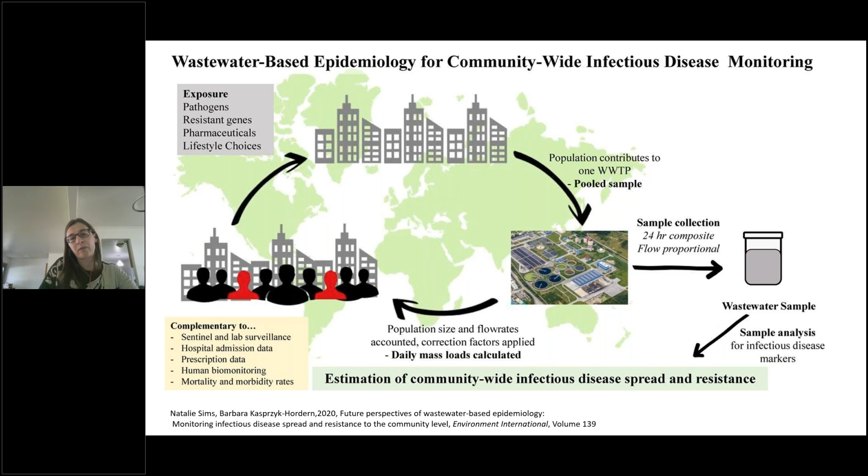So this is not a completely new tool. It's been used, it's been researched for a very long time, over probably 100 years, but really used and applied mainly for poliovirus transmission in developing countries. And the World Health Organization actually has a manual for environmental surveillance.

So in a lot of developing countries, you don't have centralized wastewater collection systems. So then often you use some type of wastewater collection systems if they are present, or even river surveillance if they are influenced by human waste. So it's actually been used to prevent outbreaks of poliovirus. For example, one of the most recent uses is from a developed country, Israel, where they detected it in wastewater in 2013 and were able to track the disease outbreak and prevent it from spreading.

There are also other international long-term studies of, for example, drug consumption in Europe. And the picture is the map of the European illicit drug use network. They have a public dashboard. There, drug surveillance has been used to understand where public health responses could be targeted. We will mainly focus this presentation on infectious disease monitoring and not on monitoring of chemical markers.

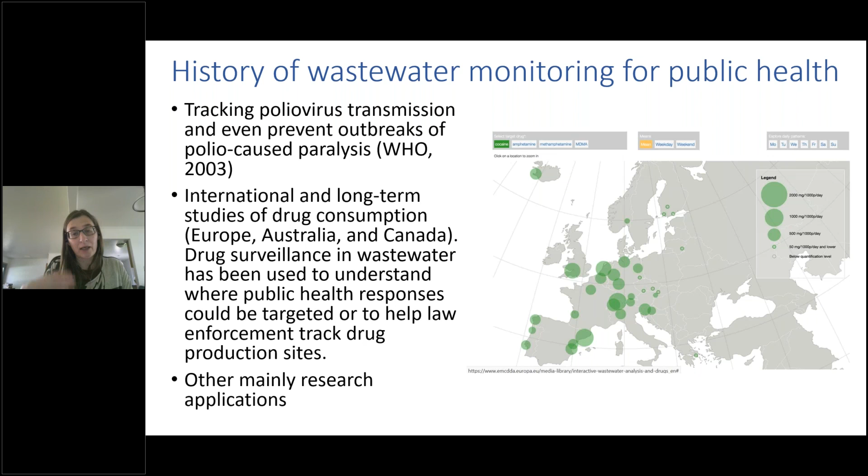Other applications have mainly been research, but it really became national and international applied science during the SARS-CoV-2 pandemic. Early in the COVID-19 outbreak, some researchers, especially those who had already established wastewater monitoring of influent for public health, noticed that SARS-CoV-2 RNA is present in wastewater.

On the right-hand side is a figure from more recent research trying to quantify where the COVID-19 RNA in wastewater comes from, and mainly it's connected with feces. Notice the x-axis is a logarithmic scale, so feces contains 2 orders of magnitude more than other sources like urine or saliva.

So they noticed it's in the wastewater and started tracking it, measuring it as an RNA fragment. There is some research looking into whether the virus in wastewater is infective, and it really hasn't been shown. People didn't even manage to isolate infective SARS-CoV-2 virus from feces, and it gets even more degraded in wastewater.

People are looking at whether the virus is present as a particle or just as a genetic signal, and most of it is genetic signal. There are also studies comparing wastewater operators or treatment workers with others, looking at disease incidence, and they really don't see a difference. So right now the science shows it's not infective anymore when it's in the wastewater - we're measuring it just as RNA, not as a virus.

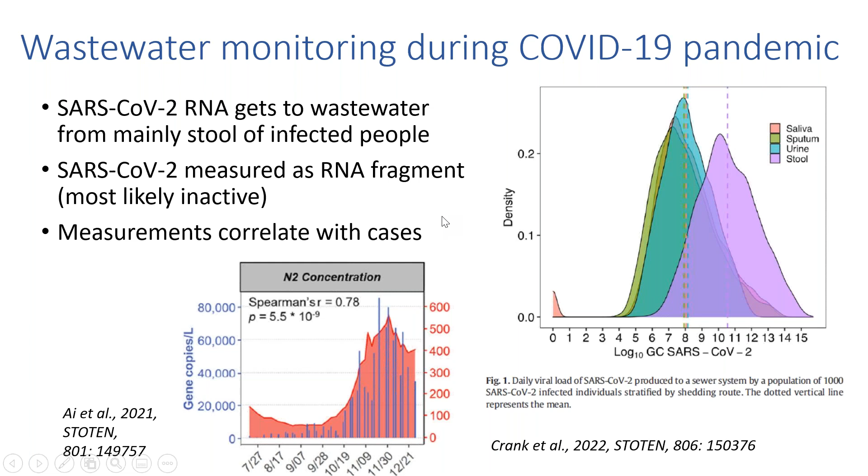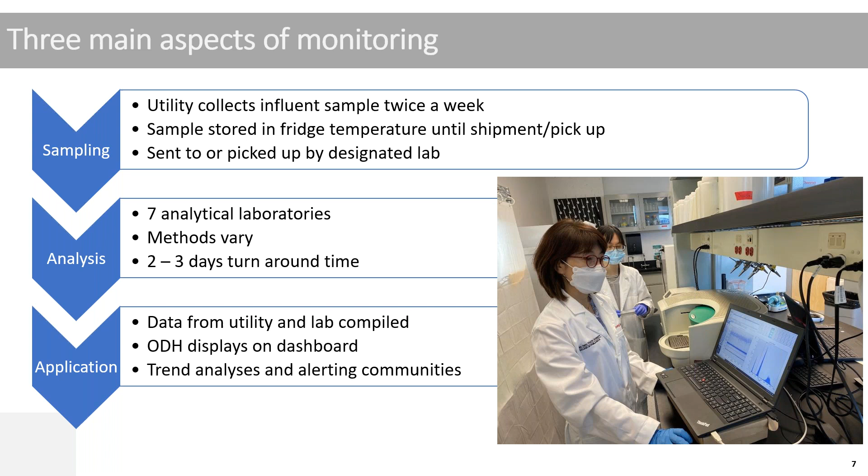In the lab, and Judith will talk more about it, they analyze the sample. We have about 7 analytical laboratories in the state. They have different methods for analysis and about 2 to 3 days turnaround time, some even shorter. Then the data are collected by the Ohio Water Resources Center, compiled, and sent to ODH for display on the dashboard and trend analysis. So Jim, you can go ahead.

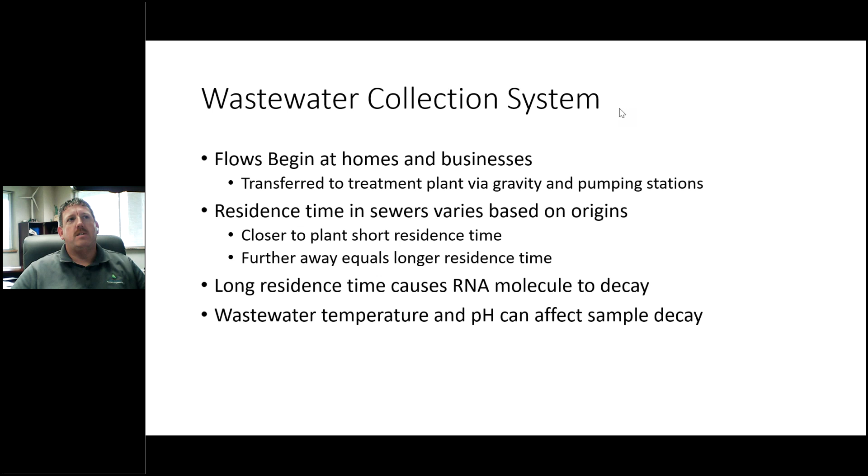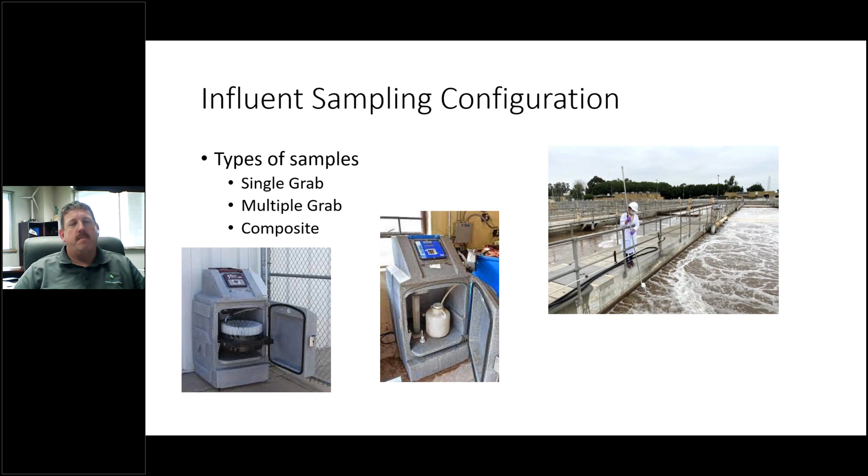So basically, with sampling, there are three basic types that can be conducted, depending on what the need is. You can do a grab sample, which is a quick snapshot, one sample, and off it goes. Some systems do multiple grabs, collecting several manual samples throughout the day, compositing it, and sending it off. Then there's composite-based sampling, which is normally automated, like those samplers there. They're all electrically pumped, and it's more conducive to getting a broad idea of what's going on throughout the day.

When it comes to composite sampling, there are a couple of different methods. You can set up a time-based system with a set amount of time between samples, or go flow proportional. There are single bottle and multi-bottle setups. There's a multitude of different ways of collecting samples, and sometimes that's based on your permit.

Right now, our permit does mandate that we do flow-based collection. So how we handle that here in Greene County is we have automatic samplers that are refrigerated, all in one unit, on every source. I have four treatment plants in the county, and all of them have one on the influent and the effluent, which helps us get comparative samples based on what's coming into the plant and what goes out. Here at Beaver Creek, because we have primary clarifiers, we also have another sampler after that, so we can see how much we're removing in our primaries and what impact that has on our treatment system.

We use a single bottle, a 10-liter bottle, and pull 100 mil samples. We aim for about 96 a day, which is kind of the equivalent of a 15-minute interval sample, but we are flow-based. That module on the right connects to our sampler, collects data from our SCADA system, and tells it, based on the number of gallons per interval, when to send the signal to collect the sample. There are a couple of different methods with that. Some places use what they call a pulse system, where the flow meters put out pulses that get measured. Ours are actually completely flow-based, so it counts down gallons between samples.

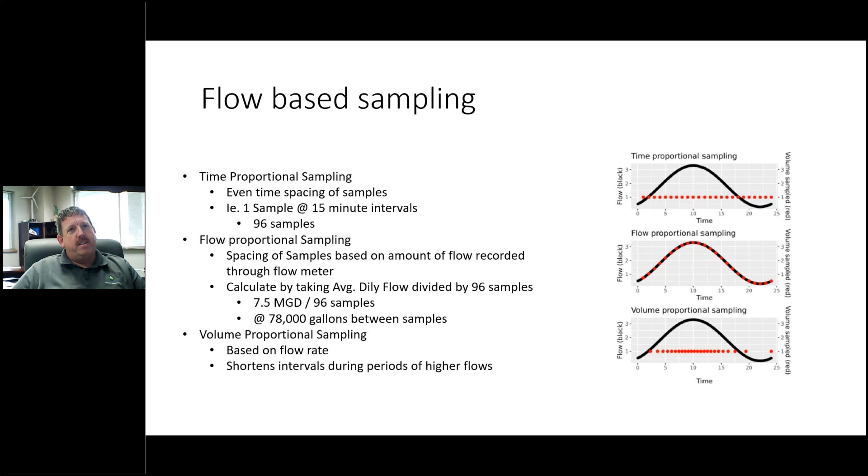So basically, here's some of the effects that can happen with the different types of sampling. Obviously with a grab sample, you're only going to get a snapshot from that particular time and place, so you're not really going to get a true representation of what's happened over your full day.

So you could have artificially high or low numbers depending on what your flow coming into the plant is. The higher the flows, if you do a grab, it's going to be more diluted, whereas during low flow times you're actually going to possibly have higher concentrations.

Time-based is better than that, but it still could be artificial because you could be collecting samples at times where you have little to no flow, or you might miss a sample time where you have a higher amount coming in. So the flow and volume based method is obviously the best, and I think that's one of the reasons most of the bigger plants in the state are required to use this type of sampling for the EPA.

Next slide. So another aspect of sampling you've got to watch for is stormwater and concentration dilution. We all know there's two different types of collection systems out there.

There's combined systems, which take your sewer flow and add stormwater flow to that, and what they call a closed system, which is sewer flow only.

Here in Greene County, we have all closed sewer systems, but that does not really mean we're impervious from outside influence. With combined sewers, your stormwater flow could actually tremendously vary the amount coming in.

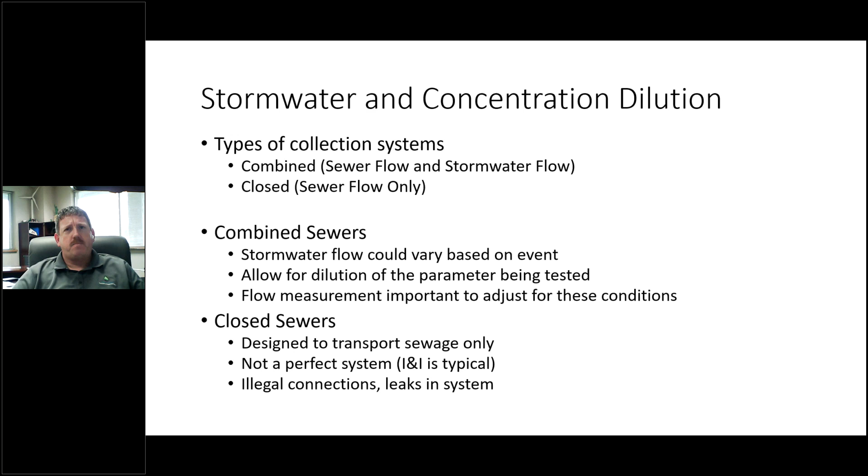So here's the other stuff that we get along with our sample every day. Basically we collect our sample, transport it to our central lab, which is actually on site here at the Beaver Creek campus, and then they package up the sample for transport to the lab.

In the beginning we were actually shipping it via UPS, which was not as convenient for us. A little over a year ago we started having a courier service come directly to the lab to pick up the samples, which helped greatly in our ability to continue on with the program. So we've been happy to do that.

The data we give to the lab includes the 24-hour flow data. We give temperature readings, minimum and maximum pH readings, and minimum and maximum temperature readings, and that helps them determine if things are broken down within the sample.

We also run our TSS daily on those lab samples and indicate that as well, because obviously the higher concentration of solids, the stronger the sample might be.

Particularly at our plant, we sample 3 times per week for our NPDES permit. The COVID sampling actually requires us to do 1 additional sample in order to meet their required intervals, so we run an additional sample, and most of the time it's not in correlation with one of our permit samples.

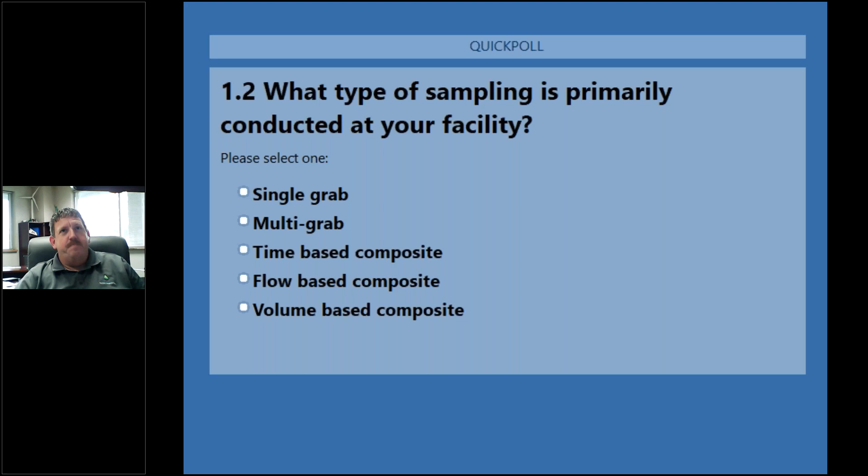So the question here is, what type of sampling is primarily conducted at your facility? The choices are single grab, multi-grab, time-based composite, flow-based composite, or volume-based composite.

Looks like we got some numbers coming in fairly well here. A lot of folks are doing flow-based composite. Right now we're at 89%, so we'll give it a few more seconds.

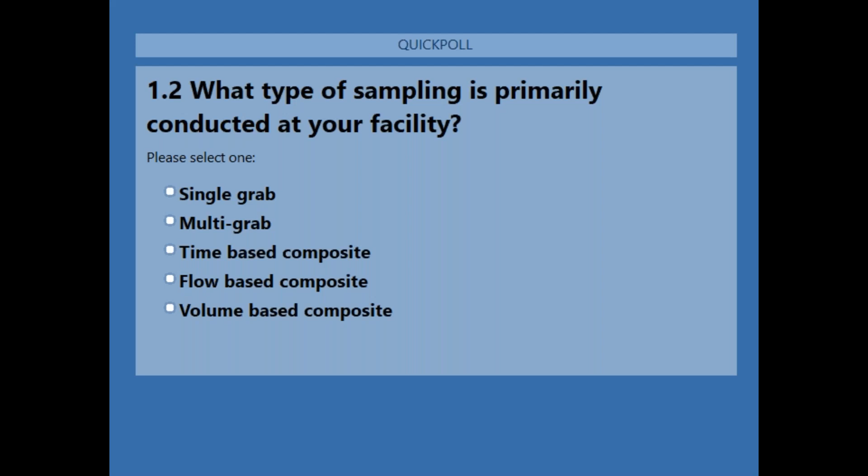Okay, 95% are in. That seems to be what we're getting. The results are 44% flow-based composite, and then roughly 20% for each of the rest.

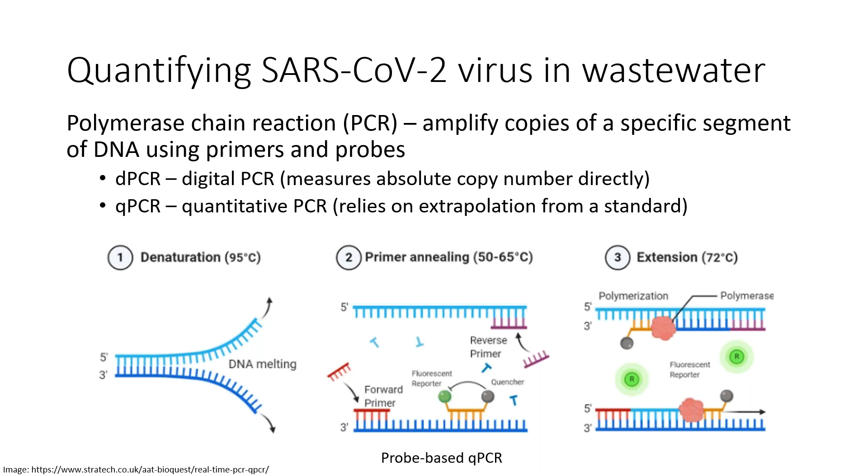Normalization of SARS-CoV-2 aims to improve the estimate of the population contributing to wastewater. Jim already talked a little bit about this, but variability within a sewer shed impacts the concentration of SARS-CoV-2. This could be due to holidays where people tend to travel a lot, or weekdays versus weekends due to people leaving for work and that sewer shed during the day but not on weekends, and also weather events such as rain or snow.

The most common markers to normalize for SARS-CoV-2 concentration in wastewater are the population in the sewer shed, flow rate, and human fecal indicators such as pepper mild mottle virus (PMMoV) or cross-assembly phage (crAssphage). Our lab specifically tests for PMMoV.

However, some studies have found that normalization does not always improve correlation. This could be due to having years-long longitudinal studies that don't have extreme weather events, and the variability of doing a study for that long allows for slight impacts, such as holidays, weekends, or weekdays, to be evened out.

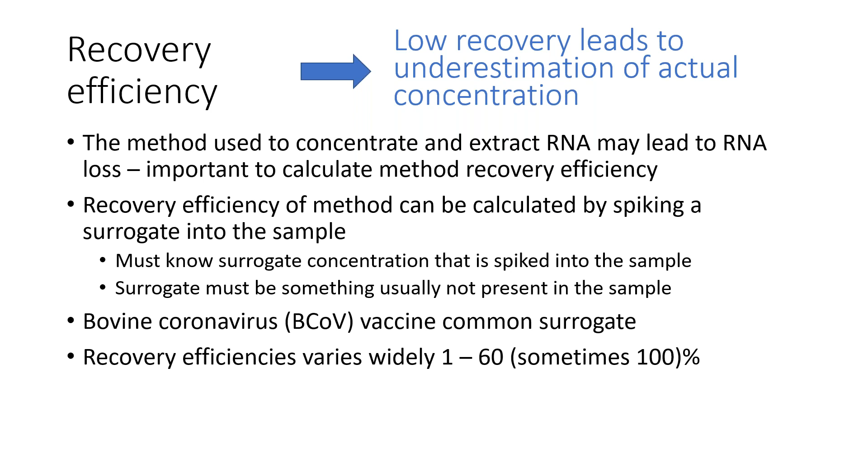Something that can occur during PCR is inhibition. PCR inhibitors are any factors which prevent amplification. This can lead to underestimation of the actual concentration in the sample. It usually affects PCR through interaction with DNA or interference with the DNA polymerase.

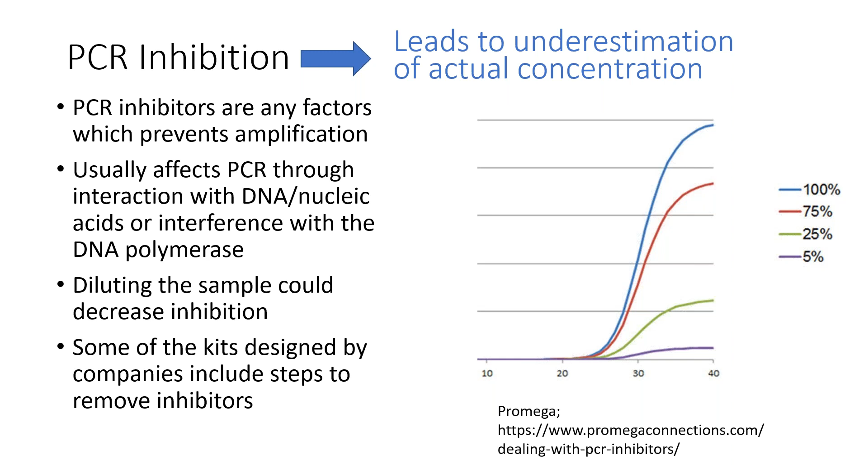Diluting the samples could lead to a decrease in inhibition, as less of the inhibitors would be present in the sample. There are also ways to test for how much inhibition is in your sample, and some kits designed by companies such as Promega include steps to remove the inhibitors.

And we have our third poll question. The question here is: what are the important factors to consider for SARS-CoV-2 wastewater monitoring? Answers range from normalization of SARS-CoV-2, method recovery efficiency, PCR inhibition, or all of the above.

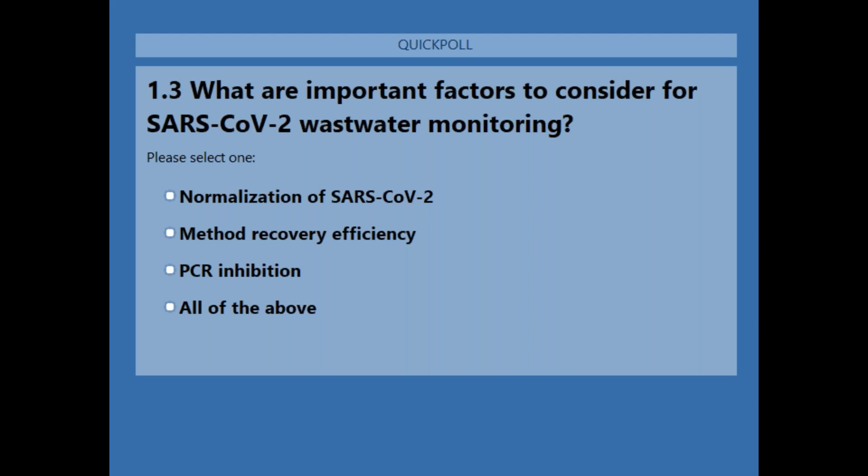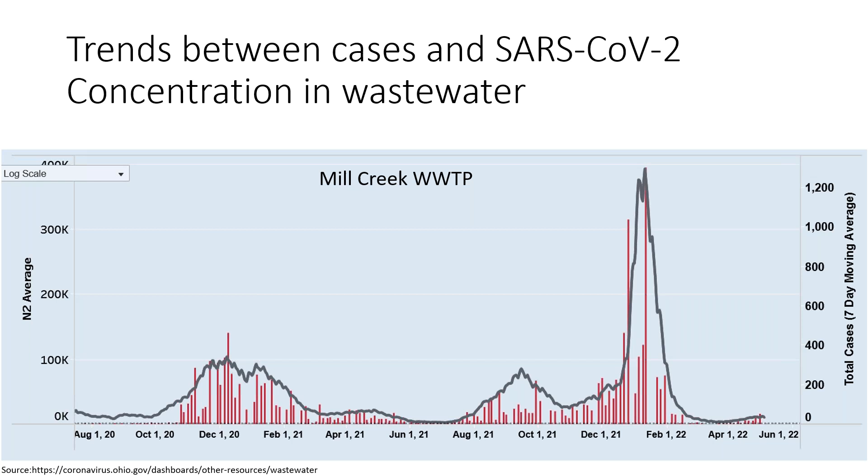This is another image for one of the wastewater treatment plants in the statewide monitoring project. You can see how the concentration spikes where the cases spike. The red is the SARS-CoV-2 concentration, and the gray line is the cases. Sometimes we see the concentration in the wastewater spike before the cases spike, such as right after December 1st, 2021. This can help with monitoring, showing an increase in cases right before people start testing. But overall, it follows pretty well.

There's an increased correlation between cases and PMMOV normalized N2 concentration, but that change was not significant, just from 0.78 to 0.79. There was actually a decreased correlation between cases and crAssphage normalized N2 concentration, from 0.78 to 0.55. These findings were just for one specific location, but over a very long time period.

So some sewer sheds might not need normalization if the study period is over a long time period and doesn't have those frequent extreme weather events. Other sewer sheds could have an increased correlation with normalization, which is why it's so important to test for these factors.

Then after our lab has quantified the SARS-CoV-2 concentration, we send our samples to another lab where they sequence RNA. Sequencing is used to determine the entire genetic makeup of a specific organism or cell type.

Initially, during the start of the COVID-19 pandemic, sequencing was used to identify SARS-CoV-2, and that was then used to develop diagnostic tests. But now, continuous sequencing allows for determining new variants present and the proportions of different variants present, as well as lineage of variants.

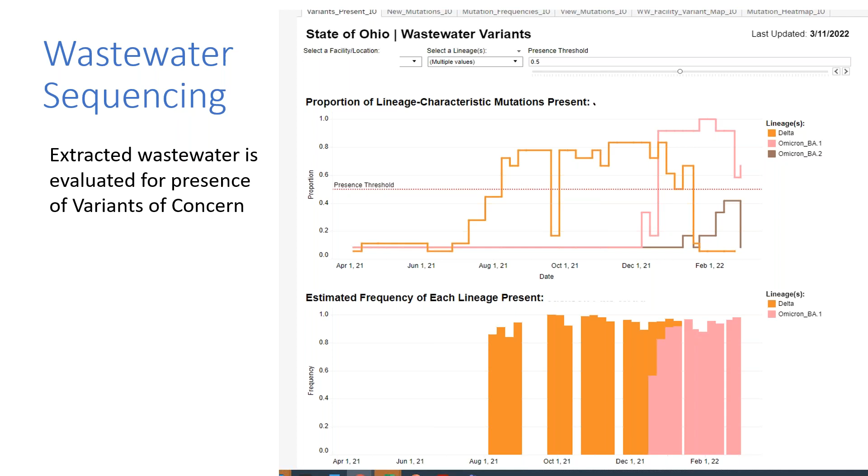And I will now hand it back to Susanna.

I only have 2 more slides left, so I just want to talk very briefly about the application. Currently, when we see increases in the wastewater, which are increases for at least 3 samples of 10-fold or 1 log, then the Ohio Department of Health sends alerts to the local health district and also to the utility.

They usually interpret the results with the knowledge of their community and their wastewater systems. They are also provided a communication toolkit and then access to tracing, now mostly vaccination and state testing teams. We have an online dashboard, which I showed a snapshot of, which is currently updated only once a week.

Then the last one is the future of wastewater monitoring for public health, at least in Ohio. Right now the interest is on a voluntary basis, and it should be public health and community driven.

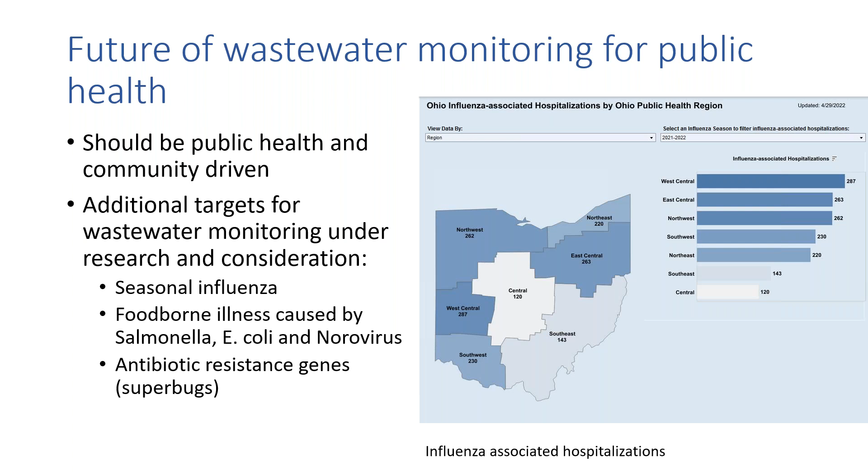This is something which the CDC is developing methods for and will probably start being implemented over the next year. And I think that's all.

The last question has to do with the interest of your monitoring for your community. Choose all of the ones that apply: seasonal influenza, antimicrobial resistance, foodborne outbreaks, illicit drugs, or other.

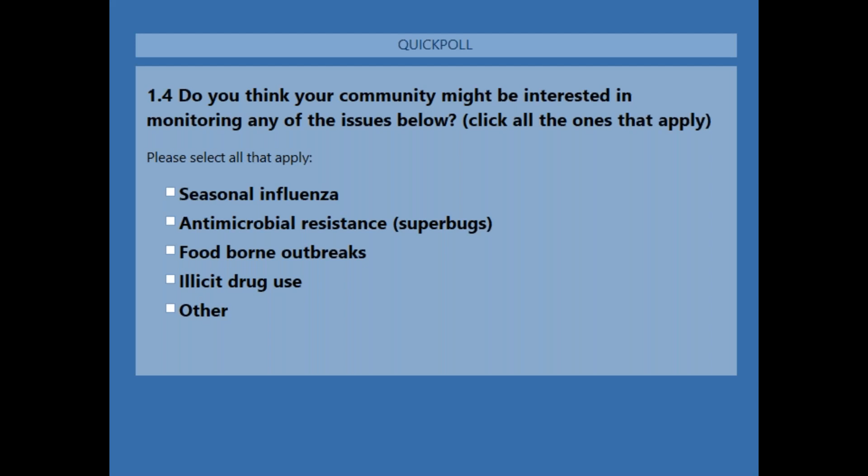Okay, everyone's voted. Looks like the majority are showing for seasonal influenza, 50% for antimicrobial resistance, 39% foodborne outbreaks, 33% illicit drug use, and 22% for other.

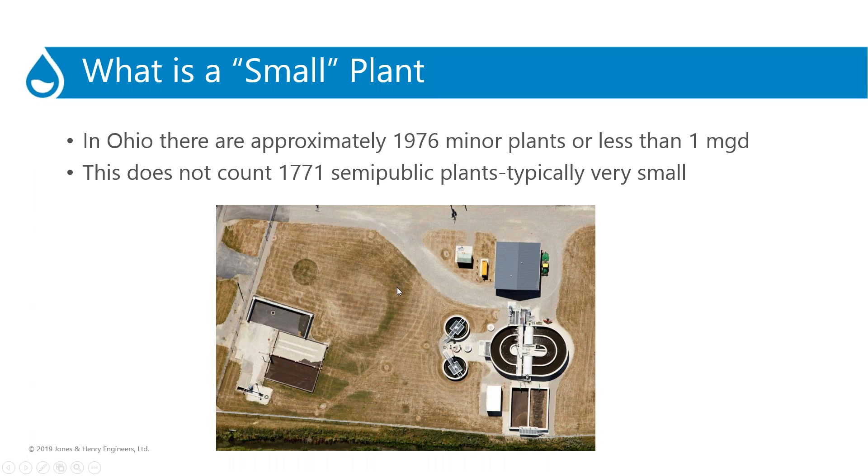A lot of the original design parameters for plants went with liquid as their disposal method for land application. It was pretty easy to store in a tank, put it in a tanker, and haul it off to the field for disposal, and that worked for a lot of plants for a long period of time.

Many smaller plants also had sand beds, as you saw at Ohio City, for disposal. So, over the years, that was really easy. What kind of happened along the way?

Well, along the way, land application periods got a lot shorter, and there was an extreme concentration of time and plant personnel needed to dispose of the liquid solids in a very short period before the farmers needed to get on the field for the most part. And with staff reductions, that window became even shorter.

Also, there's been a growth in companies that would dispose of your solids for you, though I think that's actually declined recently. So they kind of took over the liquid disposal side of it.

As far as sand beds go, I think as design engineers we were probably a little overly ambitious on how quickly the sludge would dry out and become usable to land apply. If it's too wet and you try to put it in a spreader, it'll just clump up and plug the spreader, so it had to get fairly dry to come off the spreader well, and that takes longer in the sand bed.

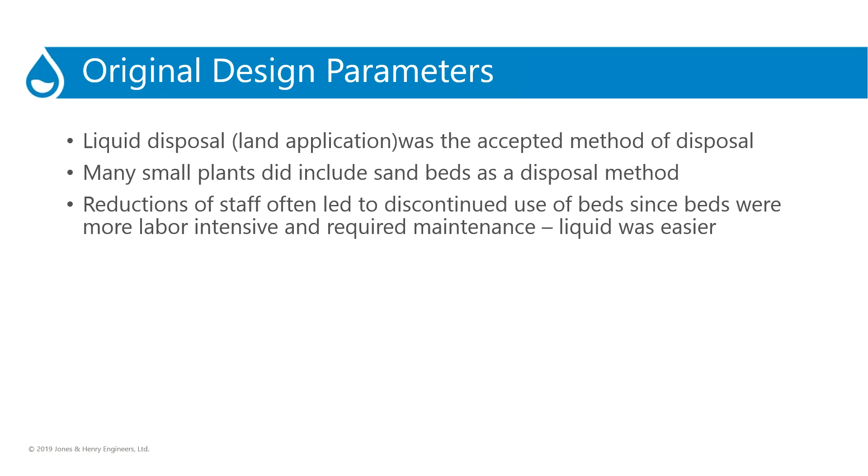One other thing I'll mention a bit later too is that on the liquid side, our wet stream, we're always trying to do better. Well, every time we do better on the wet stream, we're going to make more solids. So that kind of led to needing more different ways to get rid of your solids.

So why do some of these plants need dewatering now, other than just running out of staff? Let's look at the 3 buzzwords we always see: flexibility, sustainability, and economics. I hate to use the buzzwords, but in this case they do apply, and I'm going to cover each one. We've put a lot of small dewatering mechanical systems in the smaller plants lately, and they are making very good use of them.

So we'll talk about each area here real quick. On the flexibility side, that's kind of the chief thing we've seen really driving it: flexibility and economics.

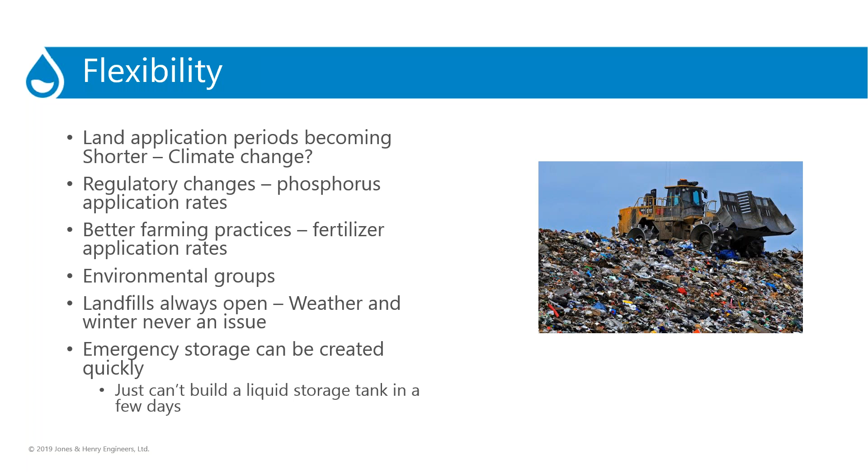As far as sustainability goes, you've seen more difficult regulations on land application, and they've gotten more restrictive. Quite frankly, regulations normally don't go in the opposite direction - they'll probably get more restrictive in the future, which will make land application even harder for Class B product. That may drive some of you guys to Class A biosolids, but then you've got to figure out where you're going to get rid of those solids as well. So it's a balancing act, certainly.

Phosphorus obviously has made it more restrictive. We've got PFAS and PFOS out there now, and that's really thrown a monkey wrench into some of the communities. Michigan has put out some regulations which are kind of middle of the road if you have PFAS or PFOS in your sludge and land applications. So they've kind of set a middle bar as far as what the concentrations can be in their sludge.

I understand that Maine has taken the approach that you can't put any materials, any PFAS or PFOS, in your land application. So if you have it, you're stuck - you're going to end up going to a landfill. That really makes it difficult. So again, that third item there, as far as sustainability, gives you a second option. You can still land apply cake, so you can utilize both liquid and dry cake application.

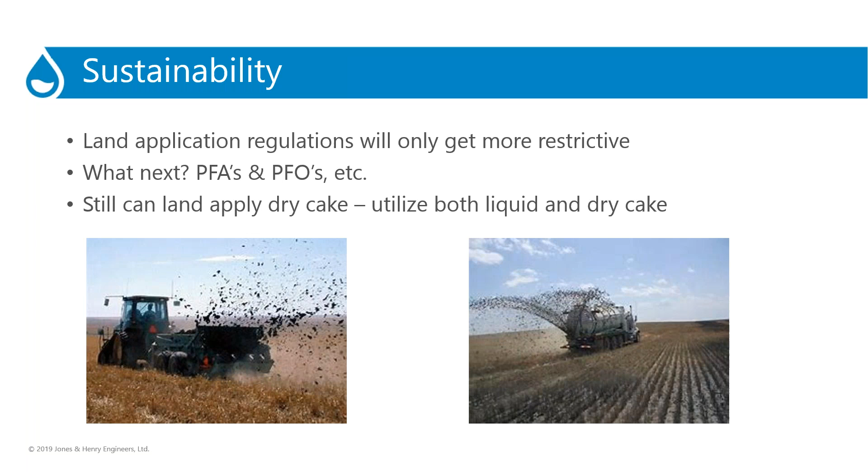And then as far as economics, lower limits. And when I talk about lower limits, I'm really talking about lower limits on your wet stream process. Lower limits will make more sludge, for example. And certainly phosphorus removal is creating more sludge, especially if we're using chemicals to get rid of the phosphorus, like a lot of communities are doing. So it's not a big bump, but it is a bump in your solids production, maybe 5% more solids.

I always remember the superintendent down in Ada, Ohio, would say, every time you guys do an improvement here, I make more sludge. And that's true. We're trying to make the wastewater cleaner, and the way to do that is get some of the solids out of it. So reducing your TSS, reducing your BOD and ammonia, you're going to end up making more solids unless you have a really, really more effective digestion system.

Some of the economics again: cake storage is less expensive to build than liquid storage. If you need more cake storage or more liquid storage, it's getting to be pretty expensive. Tank costs range, depending whether you're a steel storage tank or a concrete tank, I'd say 2 to 4 cents a gallon. Where if I'm going to store cake, I can lay down some pavement and put in some highway barriers and make sure that pavement is sloped to a drain that heads to the plant. But I can build quite a bit of cake storage for a lot less than we can build liquid storage to get you through the winter time or cake application periods.

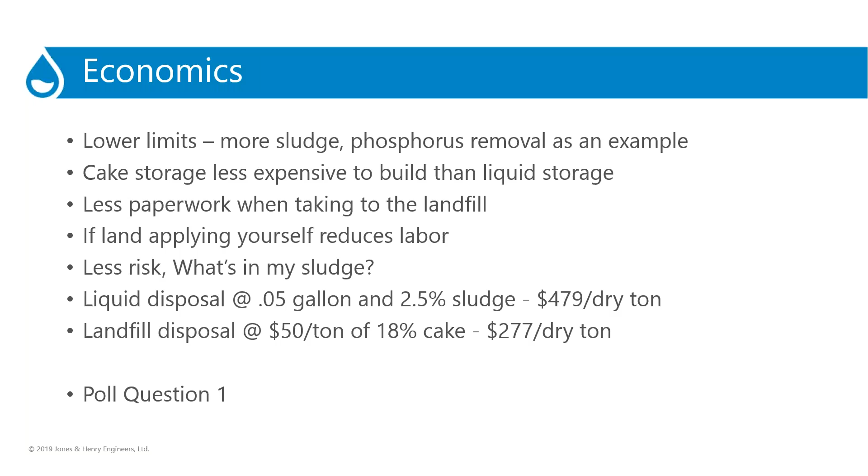Which of the following is not a reason small plants need dewatering? Flexibility, economics, odor, sustainability, or none of the above? We're about 75% in at this point. We'll keep it open for a bit. Almost 90%. Okay, 100% are in. We got 6% answered economics, 33% odor, 6% sustainability, and 56% none of the above.

All right, so let's talk about what are your dewatering options for a small plant. I'm going to start with the simplest and work our way up to mechanical. All options are on the table, so to speak. So let's start taking a look at them.

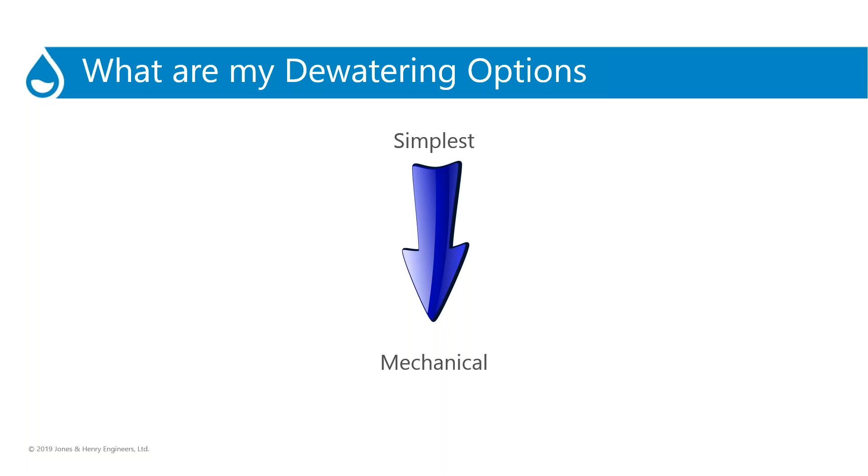The simplest would be a sand drying bed. A lot of sand drying beds were put in many years ago. You just simply dump the sludge on it and let it dry out through the weather and the sunshine. They're very simple to operate. They are kind of labor intensive—again, you're going to have to get in there and take that sludge off and put it in some kind of disposal vehicle, a truck or a dumpster. You're also going to pull up some of the sand on the bed.

Over the years, a lot of communities and guys that use sand drying beds have made a lot of design improvements to them. They've improved the runners that they put on the beds, the concrete runners—usually what you see is they put in the runners based on the equipment they have to take the sludge off the bed. They've added multiple feed points, which is helpful: instead of just trying to slug it all down from one end, multiple feed points allow the sludge to spread out more evenly across the bed. Some plants have used polymer with mixed success.

Again, we talk a little bit about the labor and equipment needed to clean the beds. And if you're not using your beds for sludge, you can always use them for sewer cleaning, grease, and dewatering your grit as well.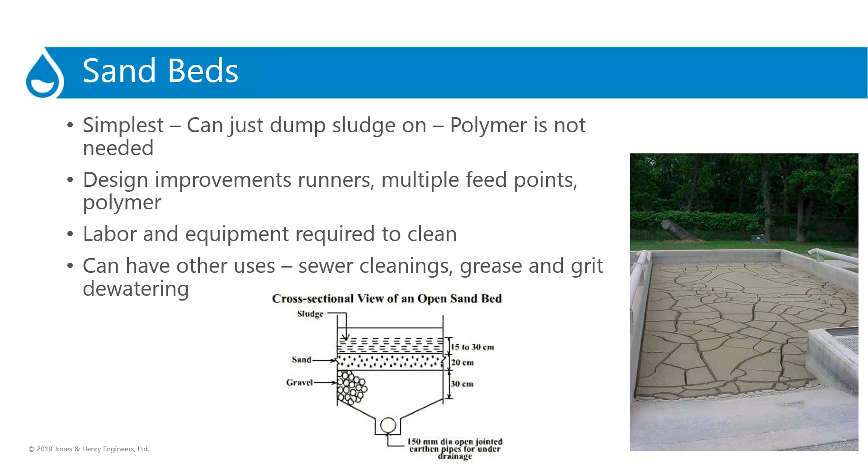Now, there are some improvements made to sand beds, called quick dry beds. There's a couple of them out there. One design puts sand on top, and then a quick dry drainage material, kind of like an egg crate, right in here. Inside there is some pea gravel. They add polymer to the mix, and then they put their outlet right in the middle.

And you guys already know polymer is a great flocculating agent. As soon as you mix polymer with the sludge, it'll start to flocculate the sludge almost immediately, and the water will separate very quickly. So the idea is to get the water separated from the sludge a lot faster, and then to get that water to move through the sand and the quick drying zone bed.

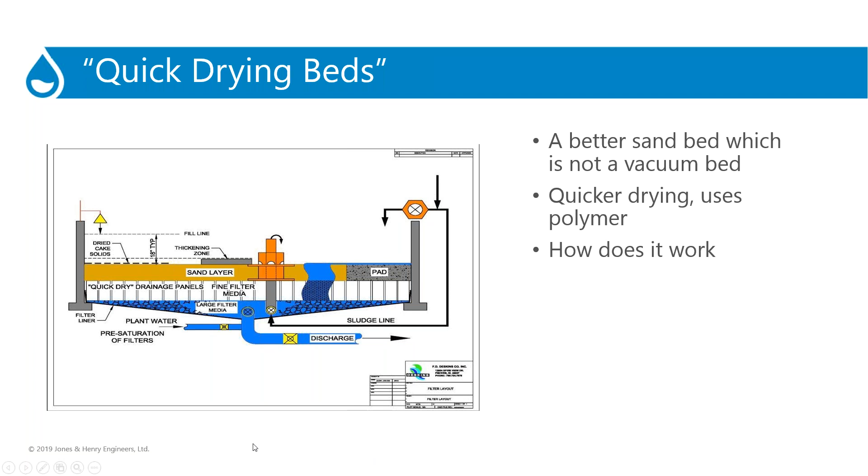I'm going to jump to the next slide, because I've seen more of this next type than the sand version, where they actually use a plastic piece of media. This is a wedge wire style media that sits on top of this style of bed. They're pretty effective. You can't pour them as thick as a normal sand drying bed, but with the polymer and the water rushing away through the pores or the wedge wire in these beds, you can get it to dry out pretty quickly.

And they can be removable, I'd say, in about 2 to 3 weeks, that's without any rain if we're lucky. So the natural tendency sometimes is to just cover them. But we want the sunshine too, and you want as much dry wind to get to it as well. As farmers know, a little bit of sunshine and some wind will dry stuff up real quickly. So you want both those elements in there.

You can load them at a higher loading rate than a normal sand drying bed. One thing you have to remember though, as you start to return or pour a quicker bed, you're also going to return higher loads to your wastewater treatment plant. So you have to be a little careful in that regard, as well as not overload your plant with high ammonia loadings, for example, and cause a violation. So there are limits to how fast you can load some things.

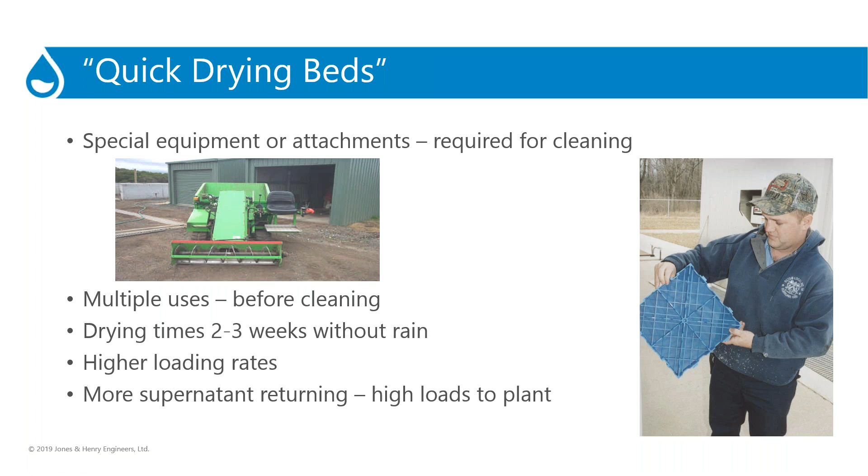Here's a dumpster style system. I can't say that I know of anyone using a dumpster style system. I would say it's really for a pretty small plant. It's a completely contained dumpster with wedge wire on the side, and you could pour multiple loads in. Again, you're going to use polymer so that you can get the water to flocculate and get out very quickly. Eventually you'll need to clean the inside of this thing, probably with a high pressure hose. I don't know if you actually have to get inside. This particular one has a cover on it, which is fairly interesting, probably to help in transportation of the sludge.

You could set it on your drying beds. And the container, actually, I understand they can be made to match what your hauler container is going to be. Here are some drains on the side, so as the filtrate drains out, it can be piped to wherever you want, or maybe if you're setting it on a drying bed, it can just go out to the drying bed. Again, I haven't seen too many of these.

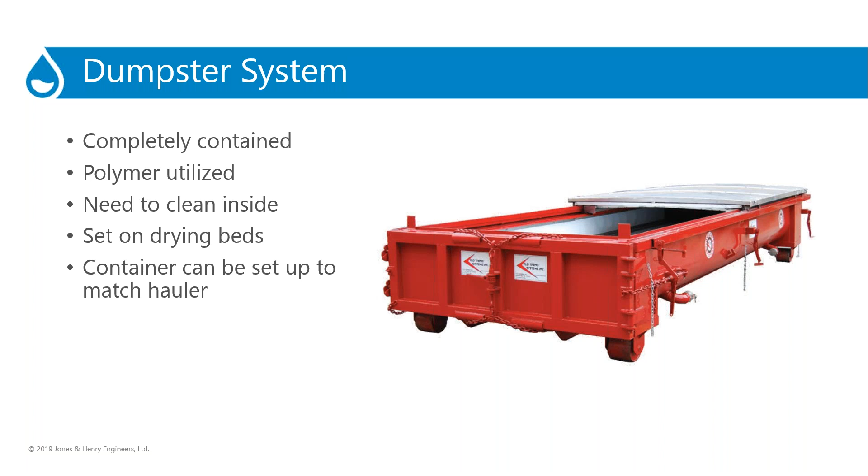What I've seen a lot more of, and you're probably much more familiar with, are Geo Bags. This particular one's sitting in a dumpster, placed on someone's drying bed for the water to leak out. A Geo Bag is a polyethylene bag with small filter-size openings. When you mix the sludge with polymer, the water, or filtrate, separates and pours out through the openings into the dumpster, which has drains, while the sludge stays inside the bag. There's no need to open the bag in this case, you can use this style of system multiple times, and the bag and everything will end up going to the landfill.

So a couple things here, and then you can match the container with the hauler. You're going to have a polymer feeder and some type of feed pump, and you need to make sure you're matching the rate of your feed pump and polymer feeder so they can feed the correct amount of polymer with the sludge flow going to your Geo Bag. I believe I have another poll question coming up now.

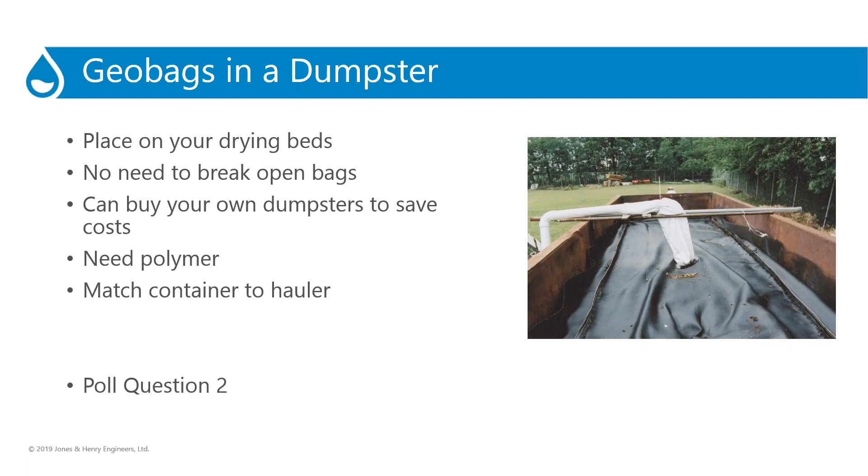Okay, in this one you're going to select one of the oldest forms of dewatering from mechanical dewatering: sand beds, Geo Bags, quick beds, or all of the above.

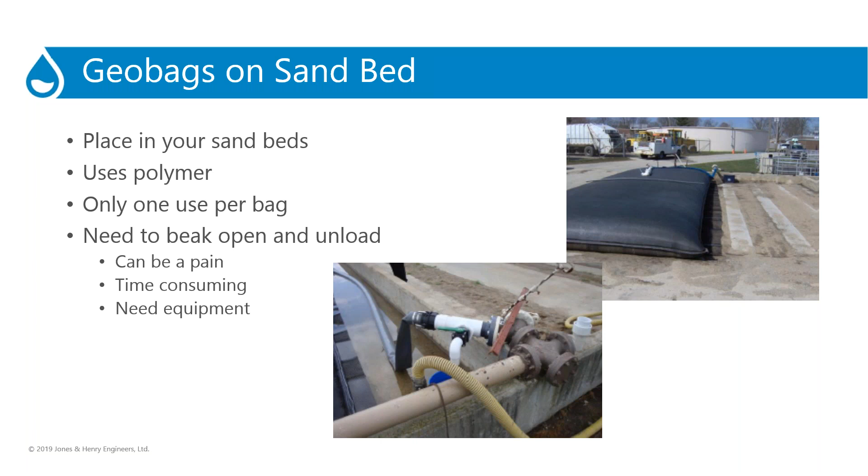I know they use them in Delta, Ohio, sitting right on their sand drying bed. I think Defiance also uses some Geo Bags once in a while. To me, the biggest drawback is the breaking of the bag and unloading it, the time it takes to do that, and probably more likely the mess it takes to do that.

I've got a couple more here. This is from Blue River Technologies. I saw one of these over in Indiana, I can't say I remember exactly where - I didn't write it down - but it's a vertical Geo Bag with some bomb bay doors that you can see there.

So when they fill the bag from the top, the water runs out the side of the Geo Bag, down the sides of the bag and off the tarp that's sitting on this dumpster. Once the dewatering operation is complete, you take off the tarp and open up the bomb bay doors there to unload the sludge.

One thing it does is allow you to reuse the bag, maybe a few times, but I would think eventually your bag is going to get clogged with some sludge particles and become less effective every time you use it. There's a reduction in labor cost in this style of operation because you're dumping straight into a container. Notice this container is lined - anybody that takes containers of sludge lines their containers so you're not dripping material along the roadway. Just pointing that out as a design feature.

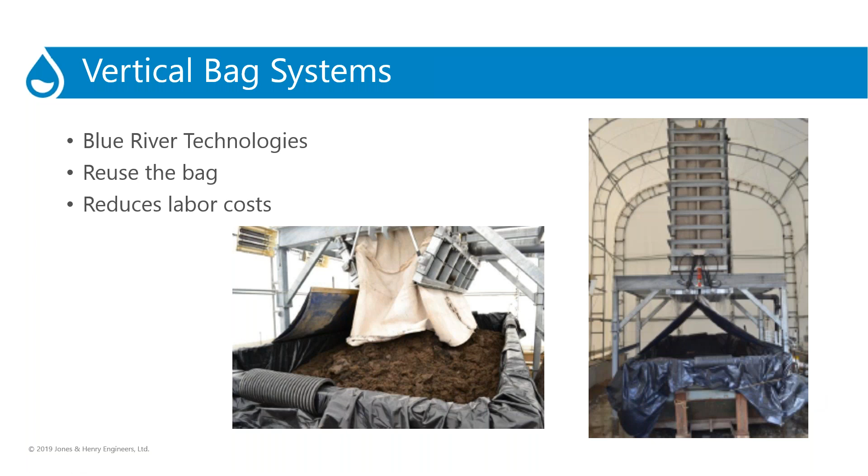Geo Bags are really popular in Ohio and Indiana. They're really simple to set up. You don't even need an engineer to set them up, you can do this all yourself. Order the bag, set your piping up, get a polymer feeder. You don't even need a contractor or anything else like this. So a lot of plants set them up. I know, when I did some research before, there was at least 100 systems in Indiana, and I guess the number is probably pretty similar in Ohio. Geo Bags are a really popular way to go for a quick way to get more cake storage or get more production out of your sand drying beds.

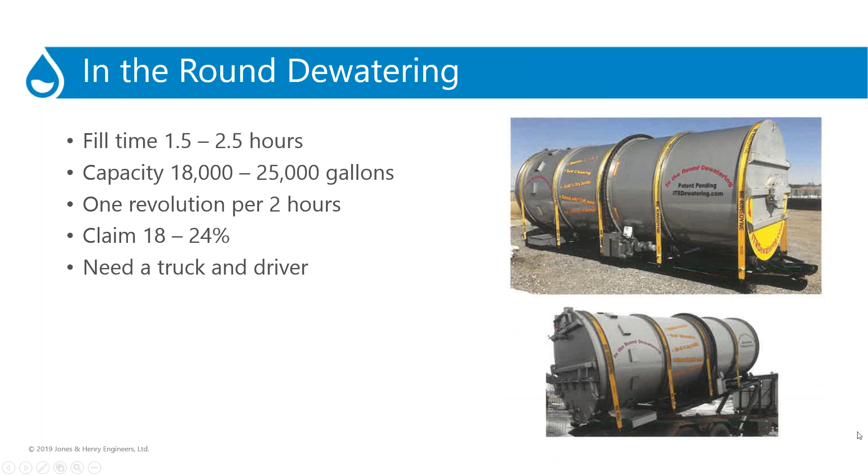Somebody sent me this one. I'd never seen them in the round, someone pointed it out. You mix the sludge in the water, and this thing turns at a very slow rate. You can put it on a truck and drive it around. I would think it might have an application where you're a county or a community that's taking care of multiple really small areas that store liquid sludge. That way you can go around and drain out some of these liquid storage facilities, small plants, put them in the round, and then end up taking this and dumping it out somewhere at your own facility. But again, someone sent it to me, I've never seen one in use, but I thought I'd put it out there.

So those are probably the simplest ways to accomplish it. What's your next step? The next step is mechanical dewatering. If you don't like what you saw in any of those, or the size of your plant dictates it, you're going to want to look at mechanical dewatering.

Some of the reasons mechanical dewatering is pretty easy: I would say it's less labor intensive than a Geo Bag or some of those other facilities. It gives you a lot of flexibility. You can run your system anytime you want and haul to the landfill to get rid of sludge. I think really what you got to figure out is what's important to your plant. Is labor a big issue? Economics, sustainability - do we think we're going to continue to be able to haul liquid at a cost that's reasonable? Or do we just want to start making a cake and have the option to take the cake to landfill or land apply it? So it gives you that flexibility and possibly lowers the cost.

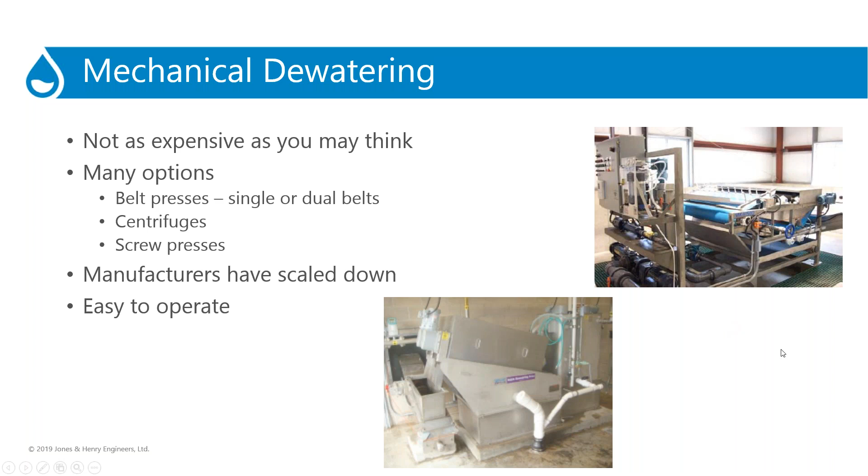So what are your design decisions? The first is your device type - what kind of device do I want to use?

That's a real critical decision, and there's a lot of choices. I'm going to run through some of the choices here in a minute.

How often do I want to run? That's really a determining factor as far as the size of the unit you need. The other big determining factor is, what do I have upstream? How long of storage, or how much digestion storage do I have? If you have a lot of digestion storage, you may decide that you don't need to run the unit very often—1 day a week, maybe 1 day every 2 weeks. That really enhances some of your opportunities as far as the size of the unit.

How do you store your product in the end? What's your disposal method? Are you going to go exclusively to the landfill, or are you going to go land application? If you're going to go exclusively to landfill, water costs money at the landfill, so you're going to want to try to get the driest cake possible. As far as disposal options, am I going to truck it? Am I going to take it into dumpsters? Do I have equipment around here?

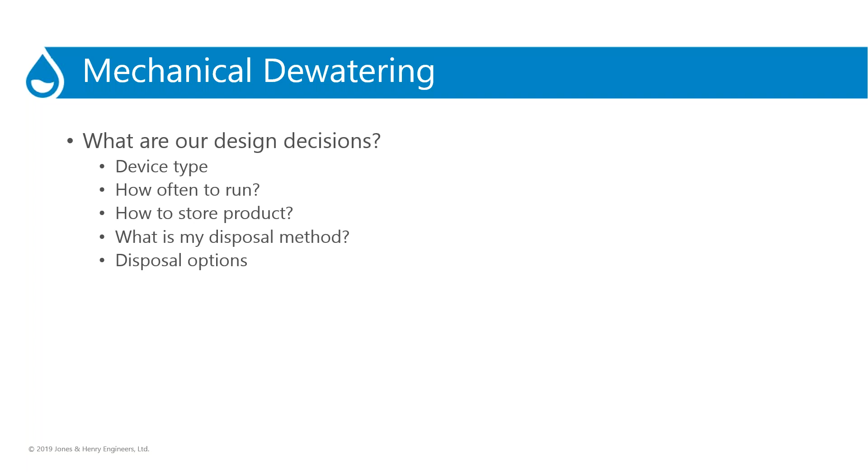So let's talk about some of the options here.

Hope I didn't pass a poll question. I don't think so yet, but I may. I don't think I did. Did I? No, I don't think I did. I didn't see it.

Here's a belt filter press. Belt filter press is a real simple device. They've been around for a long time. When I started, that was kind of the only dewatering device out there—a mechanical device that was fairly reliable. There were centrifuges out there, but they seemed to be a bit more unreliable than a belt filter press. So it's a really big workhorse in the industry.

Why have communities gone away from a belt filter press? One thing is footprint—it's a fairly large footprint. It also uses a lot of wash water. A half meter or a 1 meter belt press will use 50 gallons a minute of wash water, which is a load coming back to your plant as well. It's an open design, and to me an open design has a lot of pluses—you can see what's going on. I know they make some of these units now enclosed, because there's kind of an aerosoling going on, with belt washes and a lot of moisture around a belt filter press operation.

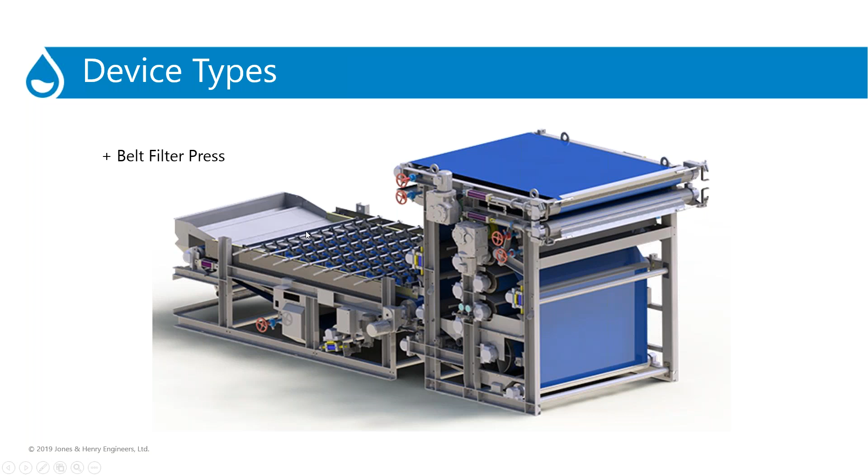So just running through how it works: sludge comes in up here, and you mix it with polymer first. Some units will have a flocculating unit or tank before it gets in. The gravity zone is the workhorse zone of any polymer unit. If you see, going back a slide, on this particular one, notice how big the gravity zone is compared to the rest of the unit, because it's really the workhorse—you're getting out a lot of water in the gravity zone.

This configuration is 2-belt, so you have an upper belt and a lower belt. After the gravity zone, it goes into a wedge zone or low pressure zone, where one belt starts to squeeze the sludge across the next two. This is a perforated drum that allows the water and filtrate to get out. Then we get into the high pressure zone, where along each set of rollers you develop more and more pressure to squeeze the sludge tighter. Along the way, the belts return through a belt wash, and that's where some of the aerosoling comes in, making the whole area kind of moist.

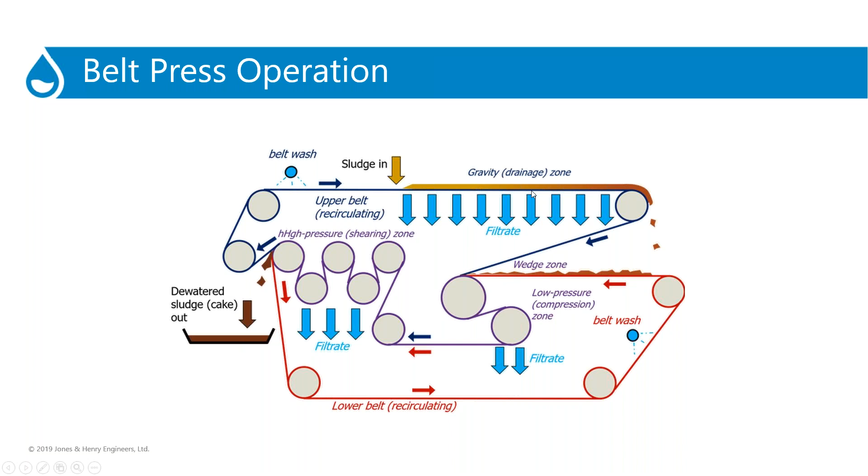But they do a great job—very, very robust units. Changing a belt is about the only thing you ever do, maybe every 2,000 hours of operation. There are some belt spray seals that usually get worn and need replacing on the belt wash, and the wiper blade needs to be washed or replaced—that's what scrapes the sludge onto your conveyor or whatever else takes the sludge away. But very robust, been around a long time, and still works very well.

Here's a screw press. This is a Volute screw press. There's a couple different types of screw presses - I'll talk about a Volute. They've been around, starting to really jump around into the industry lately. There's several manufacturers. This one, I stole these pictures off the internet. I probably should have fuzzed out the name like they do on TV shows. But this particular one, you have a mixed tank for polymer up here and a floc tank.

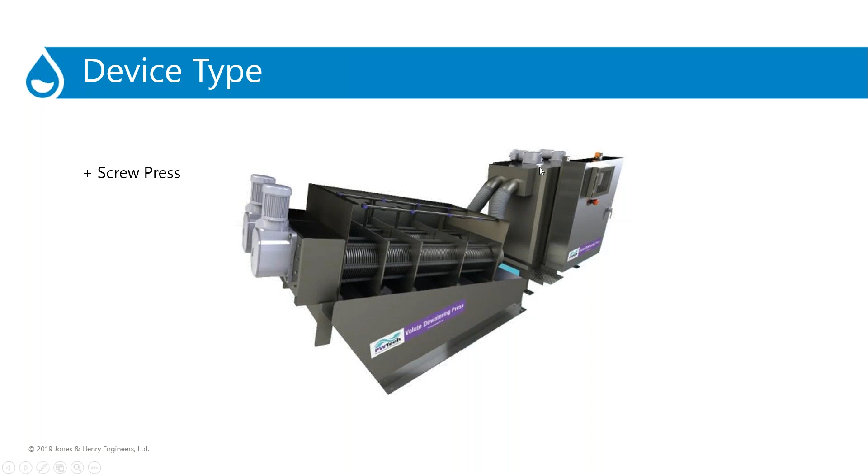Let's just jump to the next photo. I think I got it. Yeah, so you blend your polymer with your sludge prior, so you have kind of a mixed tank and here's your floc tank that you're utilizing. The mixture flows through these tubes. These level probes kind of control the level in your floc tank, your feed speed, and it flows out of the tube and then into the screw.

Down at this end is your drive motor for your screw, and then there's a compression plate down here that you set manually to kind of compress the sludge to keep it from going out the screw.

So along the way here, there are sets of fixed and movable plates. So the filtrate, as these plates move up and down, it allows the water, the filtrate, to get out of the unit. And as more filtrate gets out of the unit, the thicker the sludge gets, and it moves its way out and out of the unit.

Their popularity, I think, has increased. It's more of a compact unit than a belt filter press. There's less aerosoling - all the water is caught within this filtrate pan down here. The only spray water that you utilize are these sprays up here to wash off the sludge that's made it to the outside of the screws.

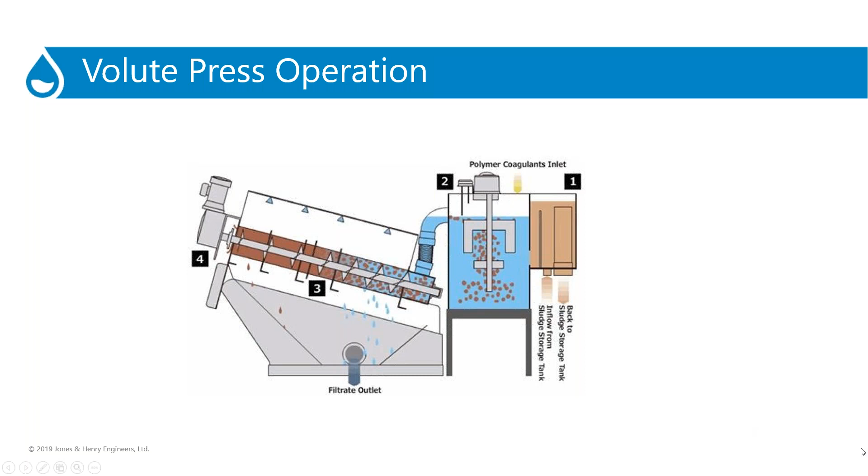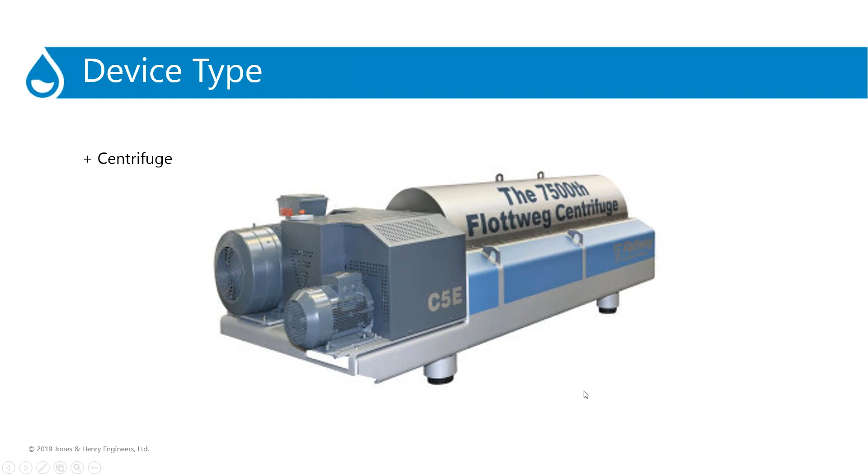So here, the centrifuge has a main drive and a back drive motor, and I'll get into it real quick. So you got a rotating bowl and a rotating scroll, and what you're doing is kind of flinging your centrate out to the walls, and you're scrolling your sludge down to the end where the sludge is discharging. Now, normally things go in opposite directions, or they can go in the same direction, sludge and centrate, but normally you kind of see an opposite thing.

Centrifuges are - I don't want to call them that, but they are a black box. So once you put the sludge and the polymer together, it goes in there and you never see it again until it comes out of the unit, or your centrate comes out. Now, the unit controls the torque within the unit, so it knows the torque and it's making good cake.

There's one thing I would say about a centrifuge: if you're going to haul exclusively to a landfill, the centrifuge, not all the time, but the majority of the time, will get you 2 or 3% higher cake. And the reason for that is you have now a confined situation, so as I apply more pressure to the sludge, it can't get away. When you think of belt filter presses, you have sludge running between two belts, and if I continue to apply too much pressure to the sludge, it'll squeeze out between those two belts, and I'll lose effectiveness and I'll lose sludge.

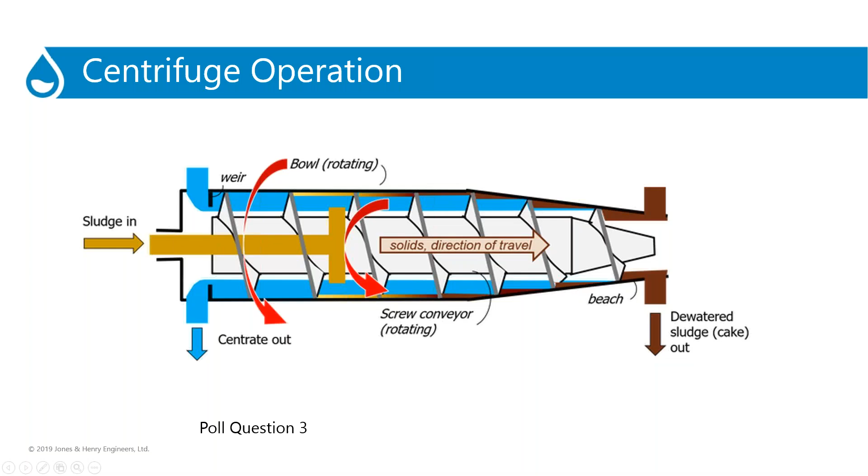So we're gonna jump in. What else do I need if I'm gonna do mechanical?

You need some type of feed pump. Not all the time you need a grinder. If you have good screening ahead, you don't necessarily need a grinder. I think we see grinders more often with a centrifuge and a belt press, but you can add a grinder.

It's normally some type of progressive cavity style pump because you want to have an even feed rate going into the device. One other thing I don't have on this list, that pump has to draw from some type of tank, and you want to be able to have that tank be some kind of, I don't know, homogeneous mixture, whether it's your aerobic digester or anaerobic storage or sludge storage tank.

You'd like to keep that tank mixed so that when you start to feed your dewatering device, you can feed it at a steady rate with a homogeneous mixture.

And what I mean by homogeneous is that it's not jumping percent solids. Like if you would suck off the bottom of the tank, it might start at 3 or 4% going to the device, and then it falls back to 2 or 1.5% or something like that. That's going to kind of wreak havoc with your polymer feed and your dewatering device. So you want to try to keep it as homogeneous as possible.

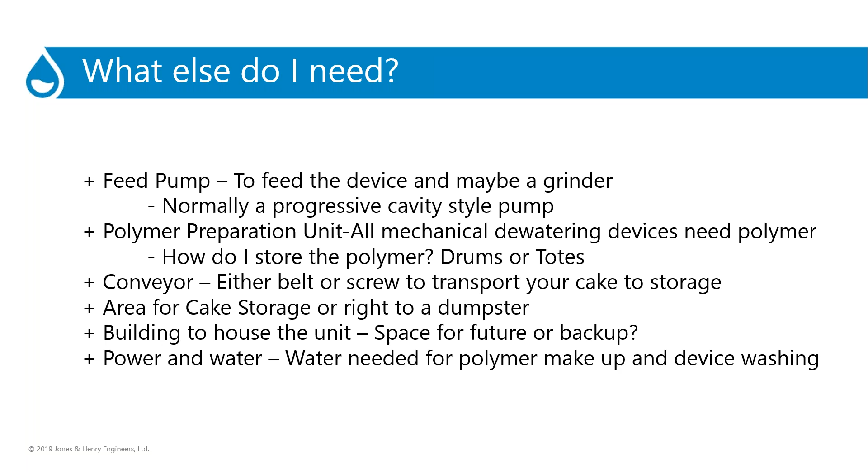So those are kind of what else you need. You know, I fall back to how often am I going to run, and how much volume do I have ahead of the unit that I need to, you know, get out of my digestion process.

Yeah, you can get a really large device and run for a very short period of time, 1 day a month, and get rid of all your sludge at once and drop the volumes down in your digesters. But that device is going to cost you a lot more money. So if you kind of weigh exactly, that's the thing, that's the price you're going to pay. Is the bigger device, the more money you're going to pay for that device. But maybe you don't have to run it very often. Maybe that meets your needs.

So storage after dewatering, you know, what we see most often is, you know, we'll end up building a building on a sand, where the old sand drying bed was, and we'll dump it right back where one of the old sand drying beds was as well. So that's usually the kind of application we see quite a bit.

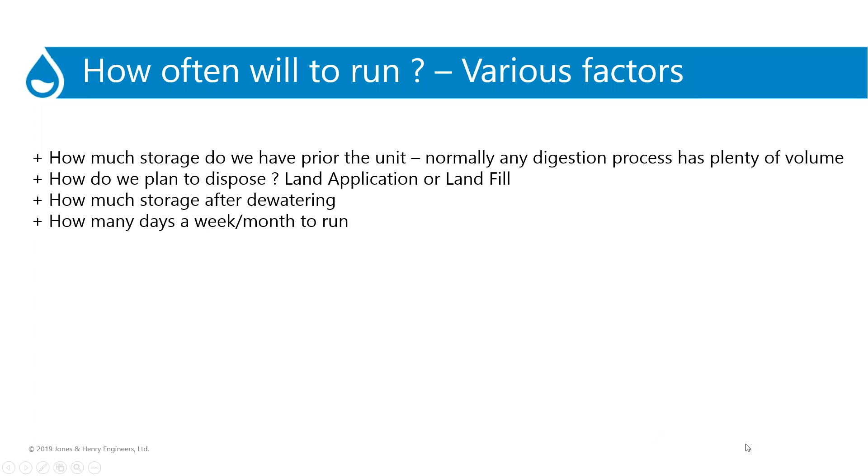And I think, how do I make this final decision? Visit other plants. You don't know what dewatering device you want, network. Go to local shows and meetings and talk to your neighbors, what they like, what works for them. It usually works around the industry. Contact a salesman and have them run a pilot, and have them run it for free, by the way.

Usually the issue is getting on the schedule. So if you've gone to a neighboring plant and seen a device you like, call a salesman or two, run a pilot, and get on the schedule. You may not get that pilot the next month, maybe not till the following year, but you get an opportunity to see how that unit will work for you.

Think about your disposal options. Am I going to go both landfill and land application? If you're going to go landfill only, weight costs money. Determine all your needs and capabilities, and then in the end, if you want to, call an engineer to discuss what they've done for other communities. But I really like networking with your other local guys and seeing what they like and what they've done at their plants.

So with that, I'll open it up to poll question 4 or your guys' questions.

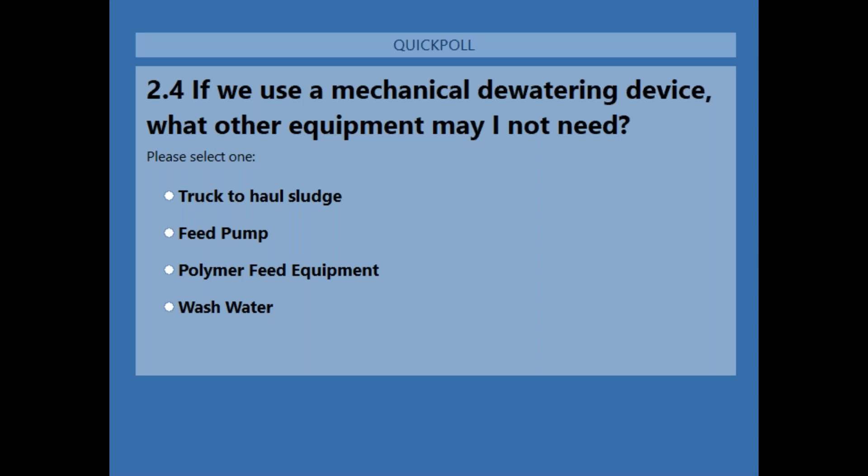So the final results are 44% said truck to haul sludge, 11% said feed pump, 17% polymer feed equipment, and 28% said wash water.